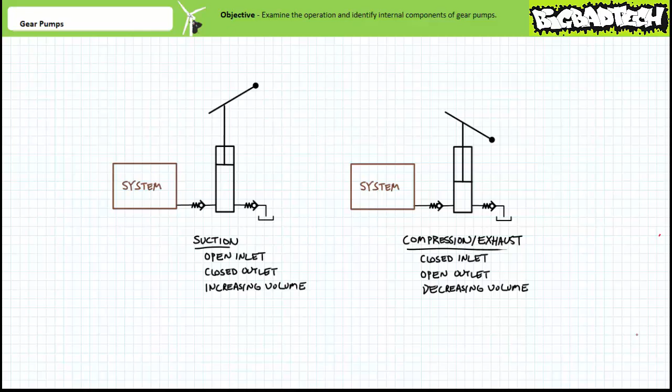Recall during the hydraulic pumps lecture, available at the Big Bad Tech channel, we introduced positive displacement pumps, where a positive displacement pump is one characterized by a clear and definite separation between the inlet and outlet ports. The operation of a positive displacement pump can be explained using a sequence of events.

First, a positive displacement pump closes an outlet port, opens up an inlet port, and provides a region of increasing volume. For a manual pump, this is the upstroke of the piston. The increasing volume forms a vacuum into which liquid at atmospheric pressure is actively drawn. This is the suction phase of a pump.

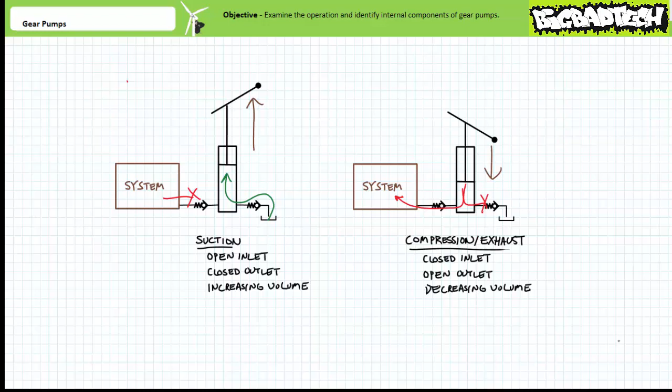Next, the pump seals the inlet port and opens an outlet port, all the while squeezing the entrapped fluid in a region of decreasing volume. This is the compression and exhaust phase of a positive displacement pump. For a manual pump, this is the downstroke of the piston.

Next, the outlet port is sealed and the inlet port is open, and the process repeats itself over and over. The completion of one full open inlet, closed outlet suction, and closed inlet, open outlet compression and exhaust is known as a cycle of a pump. For rotary pumps, one complete cycle of a pump is ordinarily one complete revolution of the drive shaft.

Positive displacement pumps use close-fitting components and must properly filter and condition fluid to predetermined cleanliness standards if they are to perform reliably. Particulate contaminants may progressively abrade close-fitting components, leading to a loss of lubrication and sealing ability, as well as hinder efficient movement of the dynamically moving surfaces.

Additionally, heat-degraded oil forms a sticky resinous byproduct known as varnish that can plug ports and glue ordinarily moving components together. The fluid filtration and conditioning lecture, available at the Big Bad Tech channel, discusses these effects and the means of mitigating them.

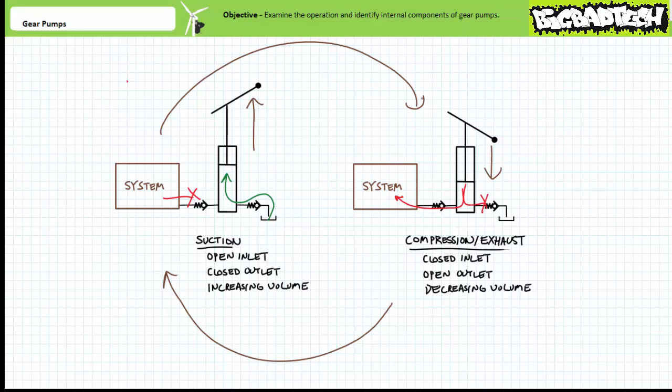In summary, positive displacement pumps have a suction phase that actively draws in fluid and a clear and definite separation between inlet and outlet ports. Positive displacement pumps are for applications necessitating high pressure, like hydraulic systems.

Three types of positive displacement pumps are commonly employed in hydraulic systems: gear pumps, vane pumps, and piston pumps. Pumps, regardless of their type, can be classified as fixed or variable displacement pumps.

A fixed displacement pump, as the name implies, is incapable of varying displacement per revolution. A variable displacement pump, in contrast, uses movable internal components to selectively increase or decrease displacement per revolution as required.

Gear pumps use a pair of equally sized meshing gears to provide pressurized flow to a hydraulic system. All gear pumps are fixed displacement pumps.

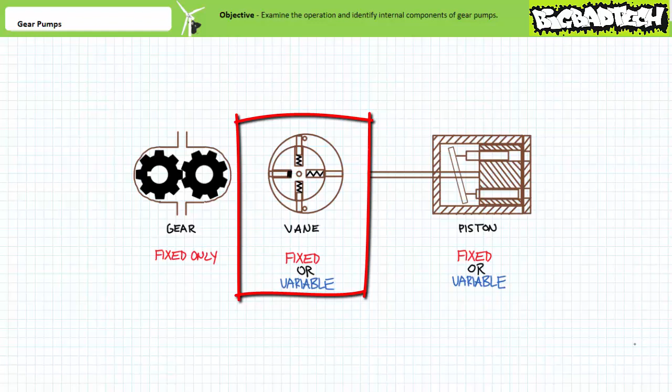Vane pumps can either be fixed or variable displacement pumps depending upon construction. A vane pump uses a slotted rotor and extendable vanes that scrape the inside of a cam ring. A fixed displacement vane pump keeps the relationship between the rotor and cam ring constant, whereas a variable displacement vane pump varies the position of the cam ring or rotor to vary displacement per revolution.

Piston pumps can either be fixed or variable displacement pumps depending upon construction. A piston pump uses an angled plate to position pistons inside a rotating piston block. A fixed displacement piston pump keeps the angle constant, whereas a variable displacement piston pump varies the angle to vary displacement per revolution. The intention of this lecture is to examine the internal construction and discuss the principle of operation

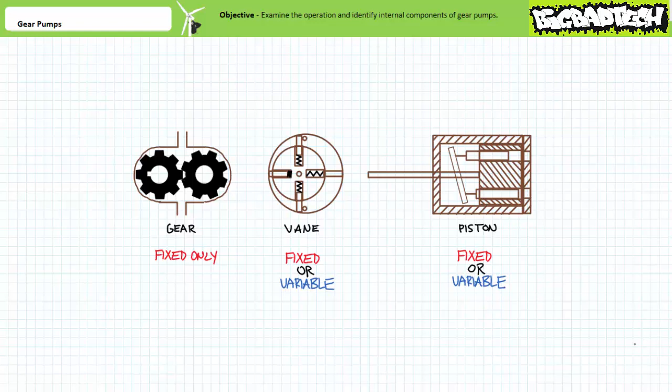on gear pumps only. Later lectures will examine vane and piston pumps. All gear pumps are fixed displacement pumps in that the quantity of fluid introduced per revolution of the drive shaft cannot be modified by moving internal components.

Flow rate is a measure of volume per unit time, and flow rate is the principal factor that influences actuator speed in a fluid power system. Flow rate is the product of displacement per revolution times rotational speed.

This calculation ordinarily necessitates a unit conversion, since displacement is customarily expressed in units of cubic inches per revolution, and flow rate is customarily expressed in units of gallons per minute. Displacement is often referred to on a pump datasheet as CIR, or cubic inches per revolution.

Since all gear pumps are fixed displacement pumps, this relationship suggests that the only way flow rate can be varied is to increase or decrease rotational speed using a variable speed prime mover, the classic example being an electric motor with a motor drive.

As discussed in the hydraulic pumps lecture, accurate flow rate calculations must take into account two important factors at increasing pressures: one, decreased displacement per revolution due to increased leakage, and two, decreased rotational speed of the prime mover due to increased torque requirements.

A graph of volumetric efficiency, or flow rate at different pressure requirements provided by the pump manufacturer, would allow a technician to predict these influences.

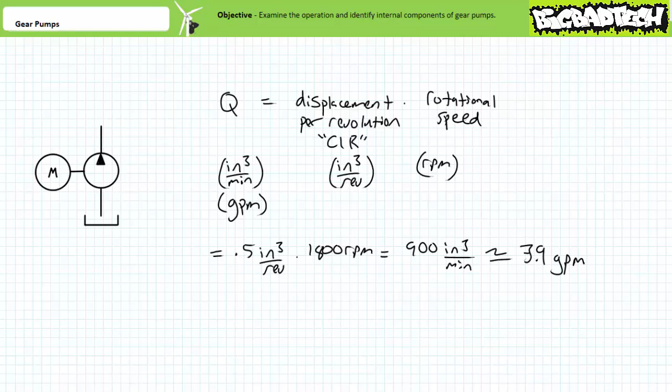However, if we neglect these pressure-induced complications, given a gear pump with a fixed displacement of exactly 0.5 cubic inches per revolution, driven at exactly 1,800 RPM, we would expect it to produce a flow rate of 900 cubic inches per minute, or roughly 3.9 gallons per minute.

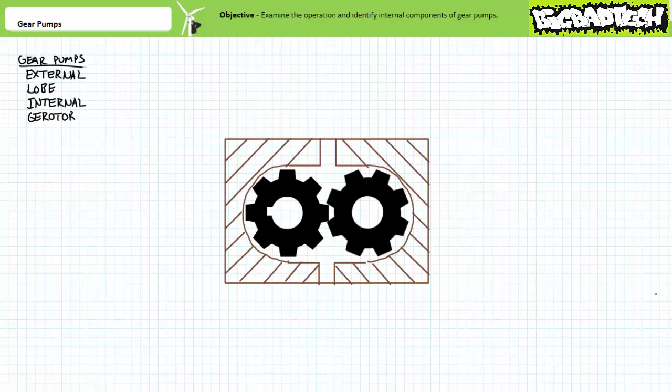Gear pumps are simple, inexpensive pumps, and because of these factors are extremely popular and reliable for most hydraulic applications. Gear pumps can either be external, lobe, internal, or gerotor type. However, the external gear pump is the most popular configuration and the focus of this lecture.

Those interested in lobe, internal, or gerotor type gear pumps are encouraged to seek guidance elsewhere because I am not going to cover them, as you are not going to run into them.

On the rare occasion you do run into them, do not let me know because I don't care. I really don't.

With an ounce of determination, you should be able to figure out how these alternative gear pump configurations execute the suction, compression, and exhaust sequences of positive displacement pumps.

External gear pumps are characterized by a pair of equally sized intermeshing externally toothed gears. One gear is the active drive gear; the other is the passive driven gear. This pair can alternatively be called master and slave, or drive and idler, among other manufacturer-specific terminology. The drive gear is actively turned by the prime mover, and is identified by having a key or keyway to which a shaft can be attached.

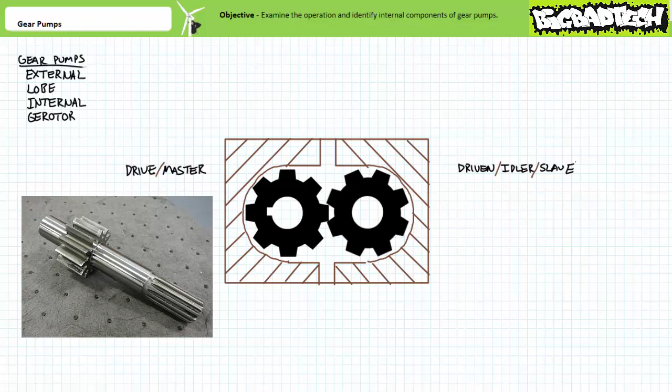The prime mover, be it an electric motor or internal combustion engine, rotates the shaft, which in turn rotates the drive gear. Rarely is the prime mover directly attached to the pump shaft; instead a coupling intermediary is used. The coupling compensates for misalignment and allows a technician to take the pair apart for maintenance, inspection, or repair.

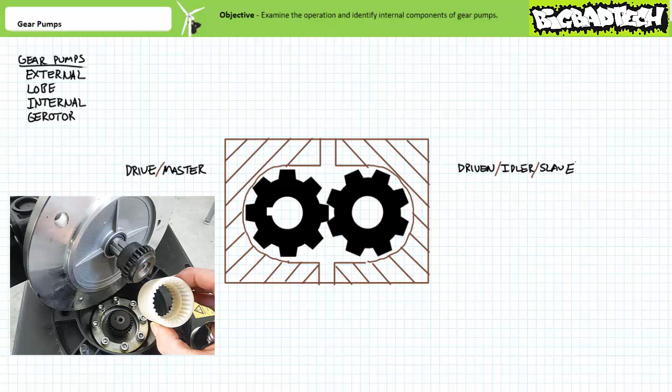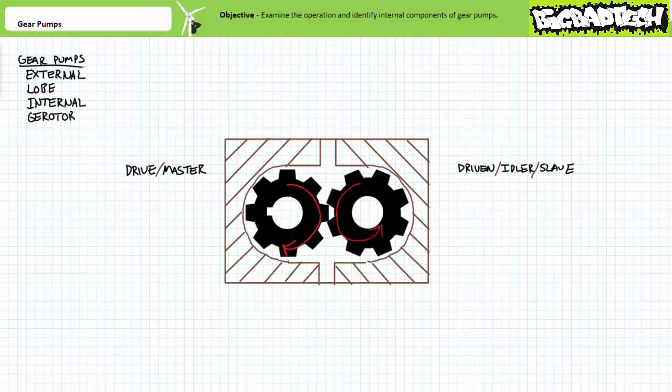The driven gear, in contrast, is passively turned in the opposite direction by the meshed teeth of the drive gear. When the drive gear rotates counterclockwise, the driven gear passively rotates clockwise. When the drive gear actively rotates clockwise, the driven gear passively spins counterclockwise.

The drive and driven gear live inside a housing or body with two ports. Given the drive gear is actively rotated clockwise and the driven gear passively turns counterclockwise, the bottom port creates a region of increasing volume as the teeth unmesh. This port would therefore be the inlet, performing the suction phase of a positive displacement pump.

Oil trapped between the teeth and the housing is brought around each gear and deposited in a region of decreasing volume as the gear teeth mesh together. This port is the outlet, performing the compression and exhaust phase. In summary, with the drive gear rotating clockwise and the driven gear passively turning counterclockwise, the bottom port is the inlet and the top port is the outlet.

This tends to be a point of confusion for most people, since they incorrectly assume liquid is pulled in the opposite direction through the meshing teeth like a piece of paper through rollers on a copier or printer. This is incorrect because liquid is an incompressible phase of matter. Liquid is sucked into the system by the unmeshing teeth and then brought around the gears and squeezed into the system by the meshing teeth.

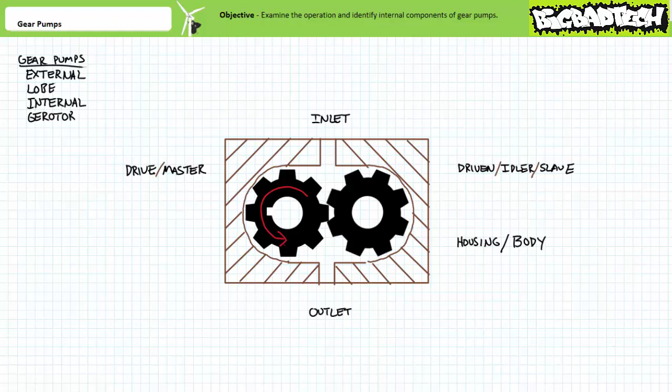If the prime mover were to switch direction, directional flow would also reverse. When the drive gear actively turns counterclockwise, the driven gear passively turns clockwise. This means the top port now creates a region of increasing volume as the gear teeth unmesh. Oil trapped between the teeth and housing is brought around each gear and deposited in a region of decreasing volume as the teeth mesh together.

In summary, when the drive gear is rotated in the opposite direction, the top port is now the inlet and the bottom port is the outlet. Note that not all gear pumps are designed to be driven in reverse and are ordinarily unidirectional. We'll examine the details behind this in a moment.

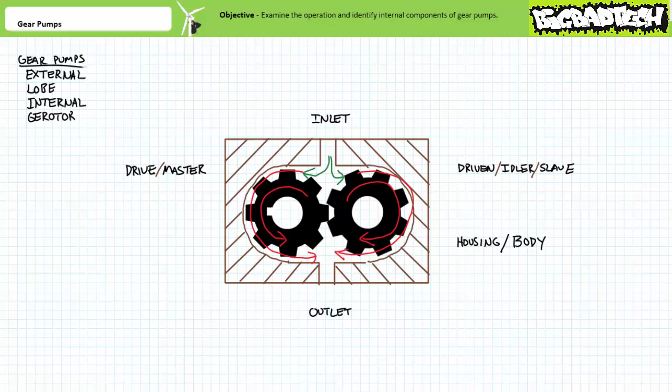You should be able to determine the direction of flow and/or direction of rotation for one or both gears given a diagram of a gear pump in different orientations. This might make an excellent quiz question, and only your lazy lab partner could blow something this easy. That's really all there is to the internal construction and basic operation of an external gear pump.

Let's disassemble some representative examples of gear pumps and identify some of the constituent parts. Here's the internal workings of an extremely simple gear pump. There are really only two moving parts, the drive and the driven gear. For this reason, gear pumps have a reputation of being reliable, robust, and inexpensive, though not the most mechanically efficient, nor suited for super high pressure applications.

When disassembled, note the idler gear spins on an axis internal to the housing, and the drive gear is permanently affixed to the drive shaft. When reassembled and the drive gear is actively rotated by the prime mover, the gear pump performs as we expect.

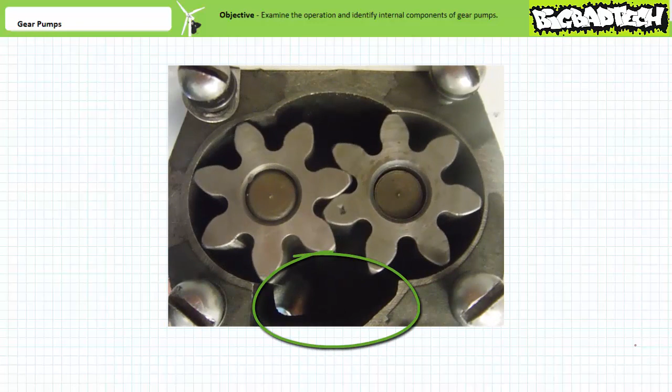The unmeshing gears at the inlet create a region of increasing volume which fluid is actively drawn into. Oil would be trapped between the teeth and the housing and brought around each gear. The meshing gears at the outlet create a region of decreasing volume into which pressurized fluid is actively pushed. In addition to the housing and the paired drive and driven gears, gear pumps have both dynamic and static seals.

The drive shaft forms a dynamic seal with the housing, since they move relative to one another. In contrast, the housing forms a static seal between the two non-moving halves with the use of a gasket or an O-ring. These seals might be the only parts that really require routine maintenance if the pump is operated within the recommended range with properly filtered and conditioned fluid.